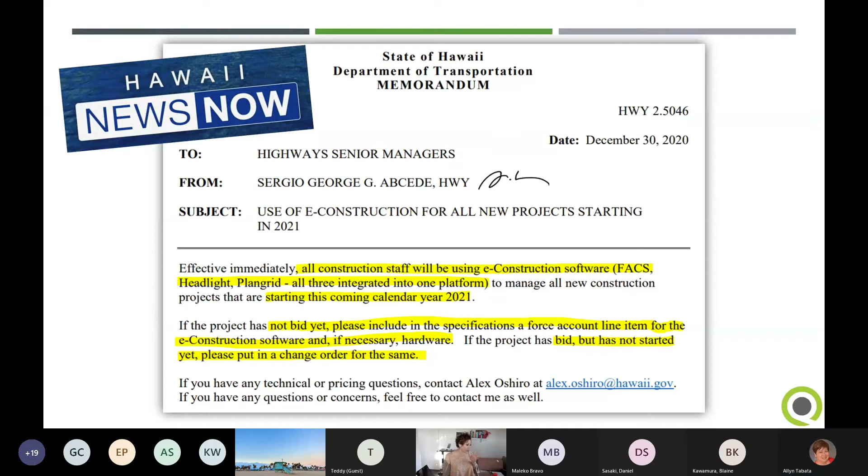So again, that's coming. So here's your warm-up question: what e-construction software is mandated by the administrator?

No, Lotus is not correct, but that's an interesting answer. Wow. Now, again, Maliko, do you even know what Lotus is?

So we've got FACS - that's correct. FACS, HeadLight, PlanGrid - that is the right answer, all three in one platform. So again, it's coming. Some of you, I think some of the neighbor islands might have been exposed to HeadLight. I don't know how many people have seen FACS, but yes, that is the answer.

So if you haven't gotten into Poll Everywhere, I believe the mandate was to use an e-construction platform - right, an e-construction platform was a mandate, I believe, last year. So now the mandate is you're going to use a platform, and it consists of HeadLight, FACS, and PlanGrid. So I believe that is the current direction. But if you have questions on that, let us know, because I think everybody's kind of trying to figure out what the direction is right now.

So for the county guys, if you haven't gotten that direction, I don't know what the direction is for counties just yet. So the next question, we haven't gotten into it, it's almost like a warm-up question.

So justifying payment - there are two main reasons for diaries. Justifying payment requests from the contractor is one. You got two choices: providing times and durations of delays, witnessing important activities in the field - ready to be on the stand, grilled by Tom Cruise - or adding contract compliance statements to the diary.

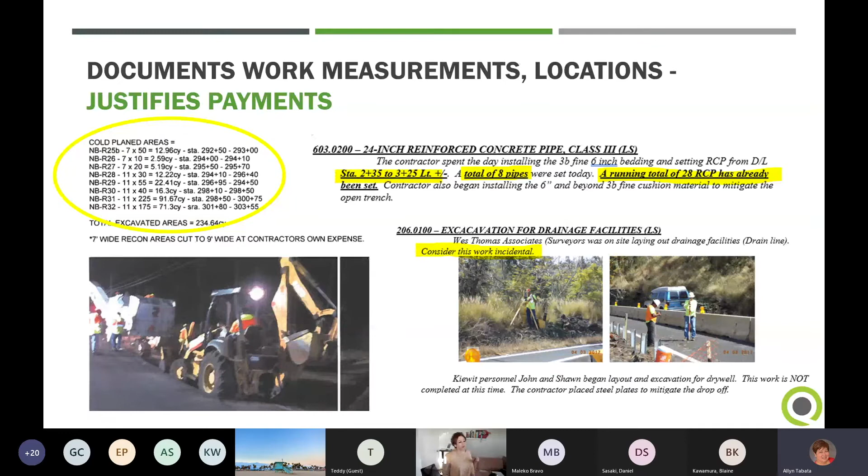Picking nits, yes Jason - that's why I said it might be more of a C personality thing, but good point. It's not that hard to say added versus installed. So those are the kind of things to watch for.

So the two main things we wanted to focus on today were justifying payment with the measurement, the compliance statement, and then any samples taken. And then this is the other part.

Again, just a reminder from our previous class - we've got our eyes and ears in the field, and now we have that eyewitness account, but it's in the middle, right? Because anybody can provide those eyewitness accounts. Just on Kapolei, I can think that Willie was out there, I was out there, we were talking during the first pour about how they were pouring it. I never did a diary. This is a good refresher for me that we should go in there and talk about what we witnessed, because there were some quality issues we were seeing as we were out there, and we were talking to the contractor about adjustments they should make. The pour itself had to be - it was kind of interesting - at this 45-degree angle, askew on a bridge structure. During the pour, the contractor wasn't doing everything in accordance with their work plan. So those are the things we should be immediately implementing into our diaries.

So is there anything else on this? A question in the chat, yes, from Teddy.

If the diary is detailed, do you need to make entries in the measurement book? The answer - I don't know yet. So let's just say we're understanding, when we do the COCOA reviews, that we probably need to be a little more detailed. We don't believe it'll be in the procedures, but it may be through the construction committee on what expectations are. Right now we're saying in the diaries, because not everybody is using the measurement book like they used to. But when e-construction comes, and when full rollout of diaries happens on projects you're working on - I think through this process we've said there's before e-construction and then during e-construction. During e-construction, everything will be in your diaries - all your measurements, everything will be in your diaries. There is no measurement book. Before e-construction, I don't know yet. I think that's the clarification we need to make with the construction committee throughout the districts, how they're doing it. They may just say continue doing work as you're normally used to doing it, so if you're used to doing those measurements in your measurement book, that may be fine. I know Oahu has been using their CPMS system, and I don't know if every project is rolling everything out, so that's the hard part. But I will say, with e-construction, everything is in your work diary - everything's your work report, sorry, that's what they call it - all measurements, everything. So there's a little bit of change coming and the program is getting worked out as we move forward.

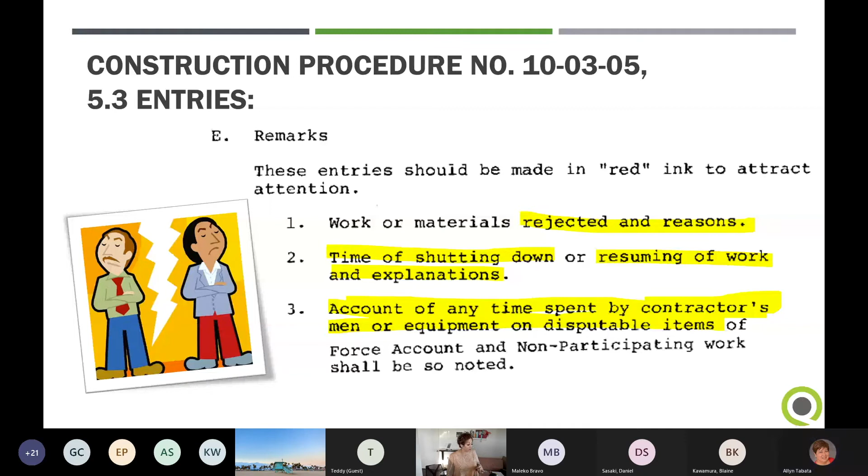So previously it was called remarks. So your work rejected, reasons it was rejected, if there are shutdowns or delays, when it shut down, when work resumed, any explanations for those things, account of any time spent by the contractor, men and equipment on disputed items, whether that's force account or non-participating work. All of these eyewitness accounts could potentially go into disputes, changes, or claims.

Then we go even more, right? Length and cause of the delays, verbal instructions, the date, specific people to whom instructions were given, and the instructions - what were those instructions? So again, if engineers are out there and they are changing, I'll go back to my Kapolei example. In one pour we did it, they made adjustments. The next pour, somebody out there told them don't follow your work report or your work plan previously submitted. All of those instructions should be in a diary. Because if something comes back and something happens, the contractor is going to say, I was directed not to follow my work plan, and who and when and why.

So discussions, because I think in that particular case they were worried about the concrete setting up and having a joint where it shouldn't have been, things like that. But it's important to provide all that background. And again, even now, I think not even a year later, it would be hard for me to remember everything that happened.

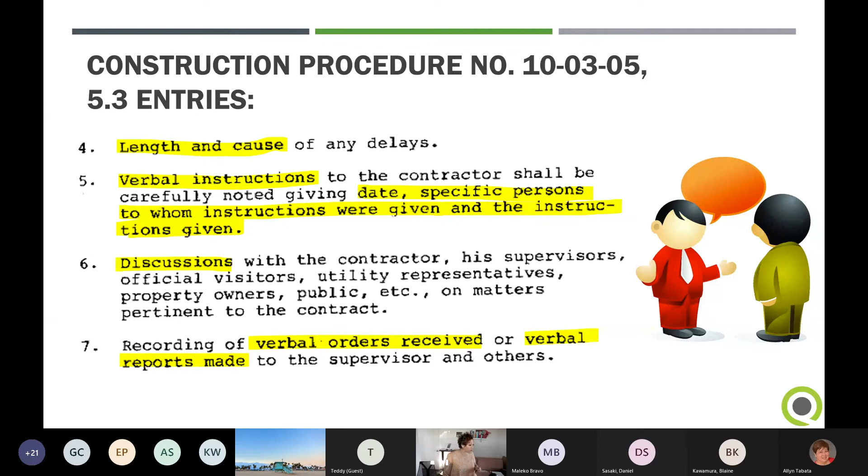Discussions with the contractor, if there are supervisors, officials, any utilities, you want to have all those annotated. Verbal orders received or reports given or made. Again, all of this feeds into eyewitness accounts.

Oh my gosh, there's more. Work performed by the contractor without inspection. So if they performed work, you found out they worked on Saturday, in your Monday diary you would say, hey, all this was done, no inspection for XYZ, and try to at least annotate, I just found out all this happened over the weekend. Work not performed in accordance with plan, whatever corrective actions might be, communications received, complaints, you know, all of those things.

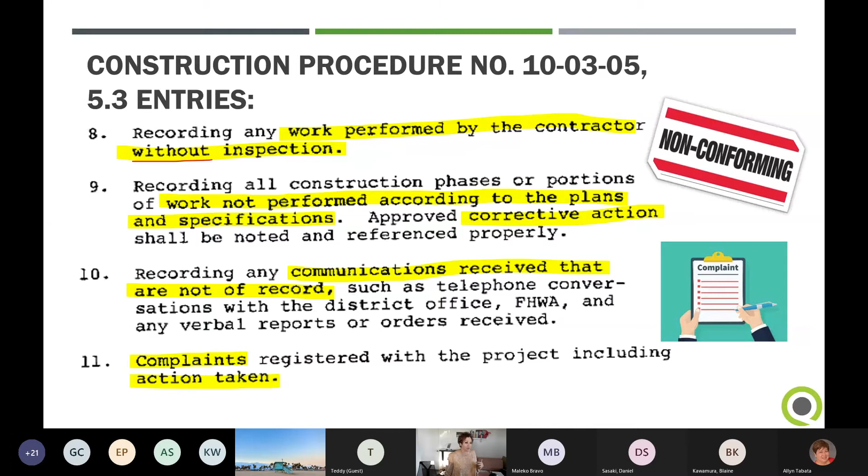The chat seems to be blowing up a little bit.

So again, all of these are part of disputes. So yeah, there's a couple inspector's questions. Responsible for payment measurements. Yes, Delton.

So there was a discussion about this because the engineers will do a lot of that estimation based on their review. In e-construction, it comes from the diaries. And so making sure, especially now, might be a little different with lump sum, but now everything's migrating back to unit price. And so we'll have to work as a team with your project engineers.

Again, there's decimal place measurements that may or may not be required. So in our next diary writing class we'll talk about what all that is. And again, we're working with Highway O with Alex to actually roll it out in the platform itself. So that hopefully will give you more information on what it looks like.

Is this program going to have formatted sheets for us to use, like a spreadsheet format? It's intended to be filled out with the device in the field. The idea is that we won't have a checklist necessarily for every one of these things, because then you'd just be scrolling past some of these if they don't occur every day, right? But the idea is that using the content of these procedures, we just want you to know that these are the kind of things that need to be recorded.

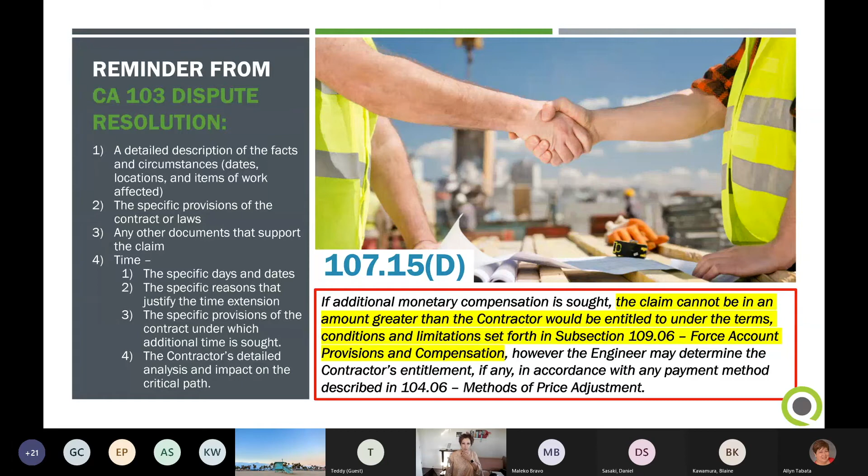So it's going to be a bit of a change for you guys. When we've done our reviews with Highway CC on diaries, everybody's doing it a little bit different. So I think e-construction is going to provide uniformity. And then hopefully, like we're saying, people are already doing the content right, great, but there's going to be a change in how it's just being inputted, because we already know not everybody is doing it the same.

So Teddy is asking, are these plan changes accepted by Federal Highway? When they audit our books, will they be satisfied? Yes, they will - all of this is being vetted through the Federal Highway Administration at a higher level.

I believe they are meeting on a weekly basis on all of this. And through Highway C, the construction program, we provided a briefing to them on the training program in general, setting some of these expectations, and they were totally on board with everything. We also meet with Kaha'a through the construction program after our construction committee meeting, which is actually this week - once a month we're providing updates on what's going on with the construction program.

But ideally, at some point in the future, there'll be a dashboard they can log into, and every audit or review or oversight will just happen in the e-construction platform. So that's why I think having very clear expectations of what is in there and how it's annotated will be important. And what I think we are doing right now is we're doing that through the wiki site.

There's an interpretation tab there. There are examples from Highway O on their change orders, and then the training class is there. The procedures are there - when new procedures are rolled out, it's there. Wherever that one-stop shop lies for construction contract administration, you guys will all have access to it. And right now it's all there. Even Federal Highway, over the weekend, was kind of surprised - they were trying to log in and we had this maintenance thing we were doing.

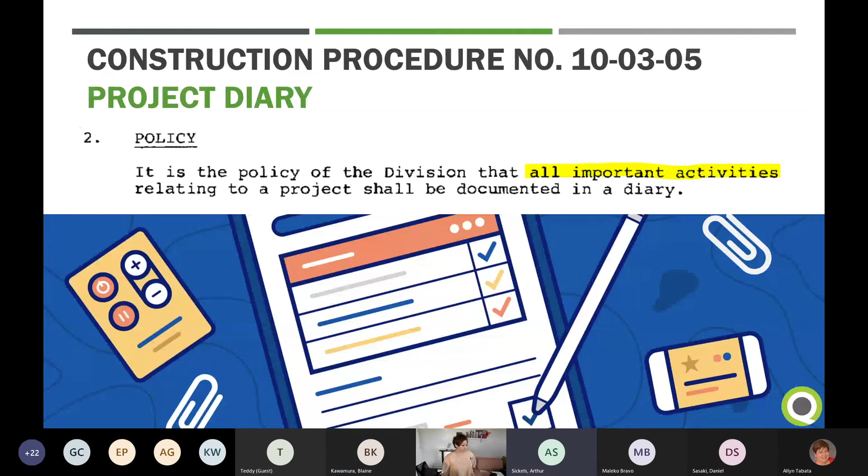So for the state, for Oahu or the state, we're working on putting in new spec sections for contractor-furnished equipment, because for us to truly use the scope of what we're trying to implement with this construction platform, we need the contractors to use it, so that submittals and everything is all paperless. So we need the contractors to buy in, and we're putting line items where they provide whatever devices we need and pay the licensing fee for the construction platform. That's how we're going to handle it in the future, it's just not in our specs yet. It'll probably be in the contracts coming out maybe the end of the second quarter, but that's how we're handling it right now.

Okay, so it's doable, it's doable. And Dalton, can that be vehicles? Yes, your REs know that they can get contractor-furnished vehicles.

So anyway, lots of these things, work with your construction engineer for the various districts, you can work with your construction engineer as well. Districts have oversight of the counties, so those would probably be your main people to work with, and federal highways on what's happening. Like I said, there might be an overall approach to all this. Besides what Art's saying, they're working at higher levels with federal highways on stuff, so it seems to be changing weekly. Let's just say that. Okay, so here we are again, back to our procedure.

The diary talks about written daily entries by personnel inspecting the contract. That becomes a daily team communication, as Art said, that the REs are reading. The REs, project engineers, maybe consultant staff, they're reading those diaries and accepting it. That's how everything's going to kind of go together.

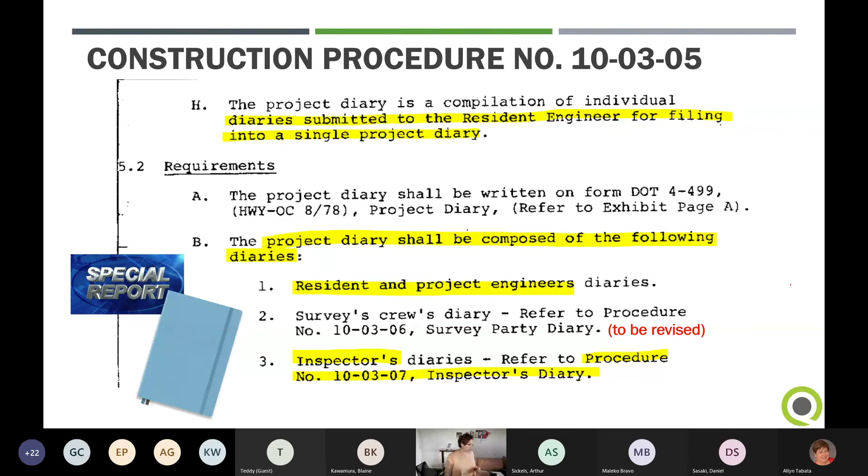Just want to point out that there's a lot of good content in your existing procedures that talk about when you're doing your diaries, all personnel who are assigned to the project, that applies to everybody, all days that the inspector is assigned to the project. So we're going to talk about that every day, working days, non-working days. There might be multiple projects that you're focusing on. So again, it's diaries for all of those, and it'll be in e-construction.

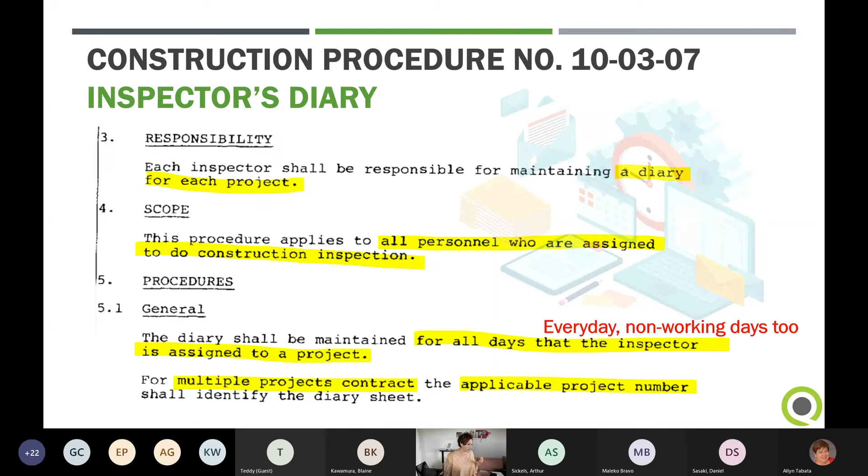So just a quick note on inspection versus observation. Inspection, in a more formal definition, is most generally an organized examination or formal evaluation exercise. In engineering or construction, it involves measurements, tests, gauges applied to certain characteristics with regard to an object or activity. That's inspection. We think of observation more as taking notice from afar. If we're observing, we may not be taking those measurements, we may not be talking about compliance, we may not be getting into the granular detail of compliance with sheet number, blah, blah, blah.

So we are really, in our role on that project, focusing on quality and quantity, and not taking that from afar, but really in a proactive manner. And like I said, it's not only the drawings, it's not only the specs, but you might have shop drawings, you might have submittals that all have to be looked at. Oh my gosh, there was an RFI that changed this. So it does become a complex activity incorporating all of these different documents.

So field measurement book, somebody had brought that up. This is, again, something that'll be incorporated into your work reports. But all of these measurement items, and like Art said, there's significant figures that go with the measurement items, so we'll talk about what those are. Again, the existing procedure talks about some of these measurements.

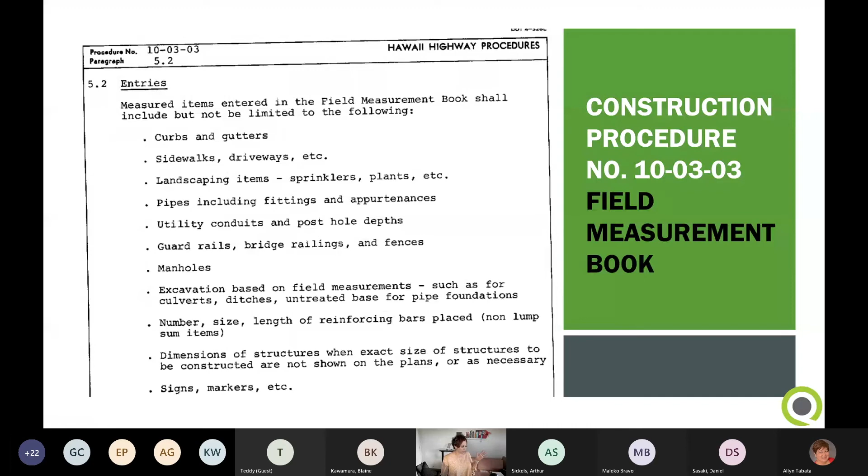Then we're going to go back to this procedure where we talk about payment, recording field measurements and references, recording that completion statement and compliance in accordance with plans and specs, especially at the end, and then making sure we've annotated if samples were taken.

So sample taken, right? We have been talking about all of these statements that justify payments. One justifying payment is measurement. The second one is some kind of statement that was done in compliance with plans and specs. And then the last one talks about any samples that were taken. So those are the three things we want you to focus on when you are justifying payment.

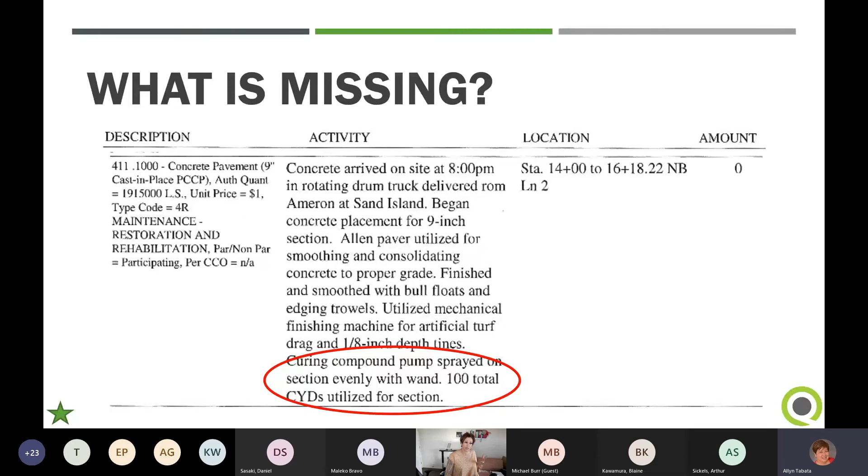But really, we need the quantity. It goes back to that measurement. We need to know how much was placed, and that for sure was missing. But you could say the statement was missing as well. Anyway, so that's just an example of some of the things that your engineers or your resident engineers might be looking for.

Again, more information in the measurement and payment procedure, where it talks about square footage and it talks about materials and it talks about how we're going to record those things. I believe we've got field measurements, that's all a part of it, but the calculated lengths and things like that, I'm not quite sure how that happens in e-construction right now. I just haven't had exposure to it, but we'll work with Highway O on that.

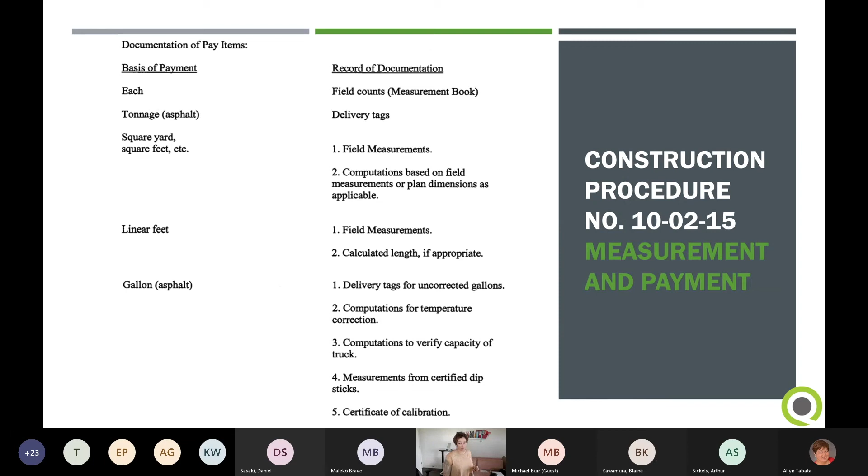How, I'm honestly not sure where the delivery tags go. And I don't know, Alan, if you have more information on that. Well, these slides here are just kind of an indicator of what kind of measurements and the standard quantities that you'll see. So if you're not sure, you can reference this information to see what type of things you're going to be looking for to quantify.

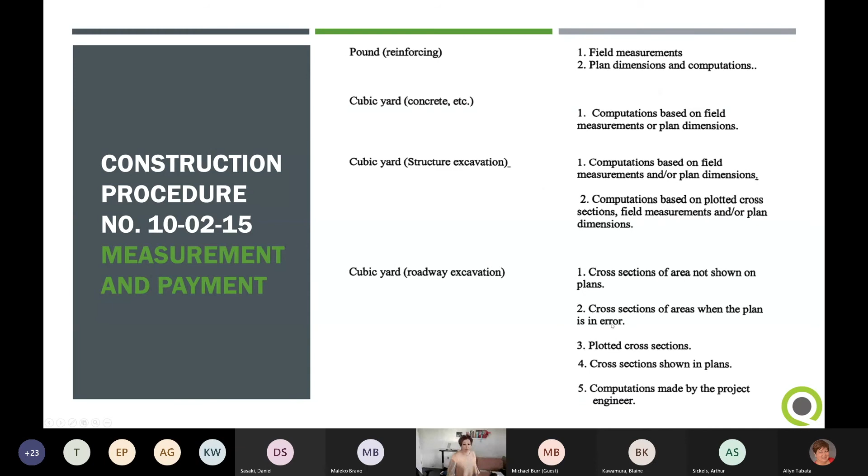So you've got this lump sum, right? And it talks about delivery tags and computations. So that's the part, Alan, I'm just not sure. Right now they'll have a clipboard of delivery tags that document stuff. So they'll become attachments pretty much with a work report that's annotating these things. So yeah, we'll have to work out where they get connected, all those details. But the content will be these things. Right. Just the how in e-construction will follow.

Right. And so again, a lot of good content in the existing procedures, and now working on that writing module, how it's going to look in e-construction, we'll work towards that.

Alan, were you guys going to work on getting electronic tags so it's not a paper tag? Yeah, I mean, that might be kind of a longer term effort, it sounds like. Alex had that on his list of objectives. The idea of paperless is paperless, right? Right. But that's like working with industry as well. Yeah, so I think it'll still be attaching the tags that we have, but maybe not the physical paper, but a photo of something like that. It'll be an electronic file when we get it into the system. Okay, we're working towards all of that.

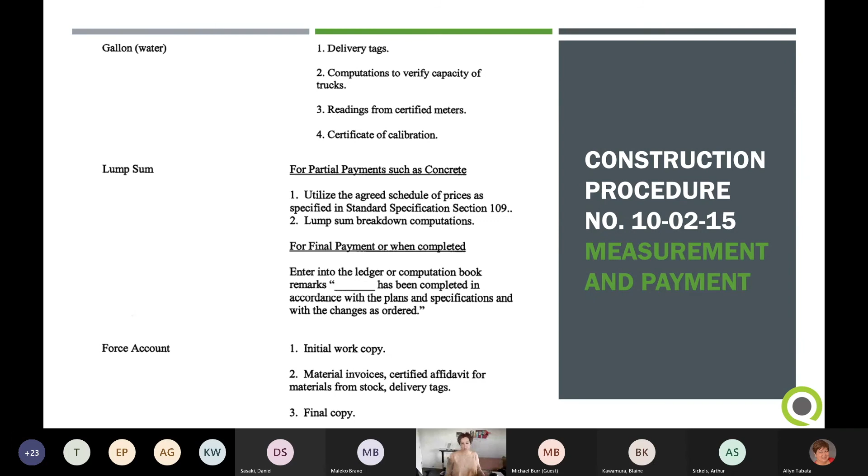Our meeting on Friday, we had certain priorities, so we'll have to kind of lay out all the priorities. Work in progress, let's just say. So we're not there yet. Yeah, but a good point to bring up that we want to work towards e-ticketing and paperless. And there are just, again, even though some of you guys may be doing these things, everything is going to be changing with e-construction and how these things are input into that system.